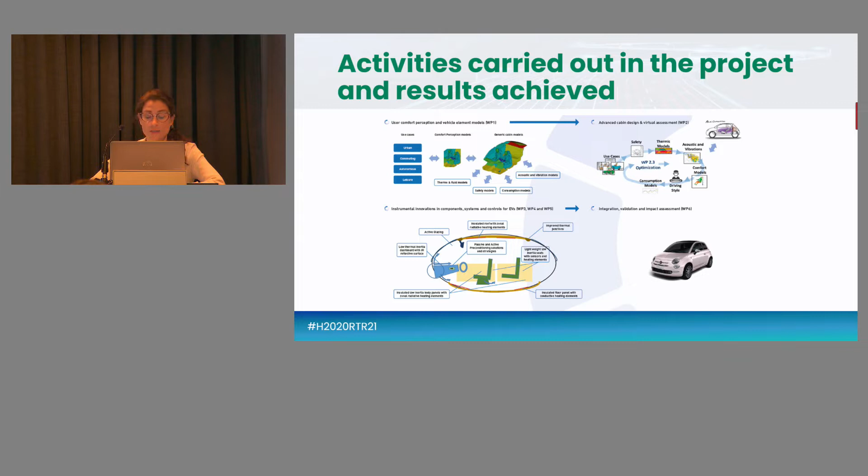So let me show you a video of one of the first tangible results we got for this project, which has to do with a virtual mock-up - a physical virtual mock-up at full scale - that we did during the project. So let's play it.

Current electric vehicle cabin designs are usually derived from conventional combustion engine vehicles that, having the engine as an abundant source of heat, have not been optimized in a way which enables electric vehicle efficiency demands to be met. DOMUS aims to generate designs of radically innovative, user-centric electric vehicle cabins that could help achieve such sustainability goals while achieving effective, safe, and comfortable experiences by vehicle occupants.

As a result, 3 different cabin designs were conceptualized where DOMUS's innovative elements were combined with key innovation design modifications.

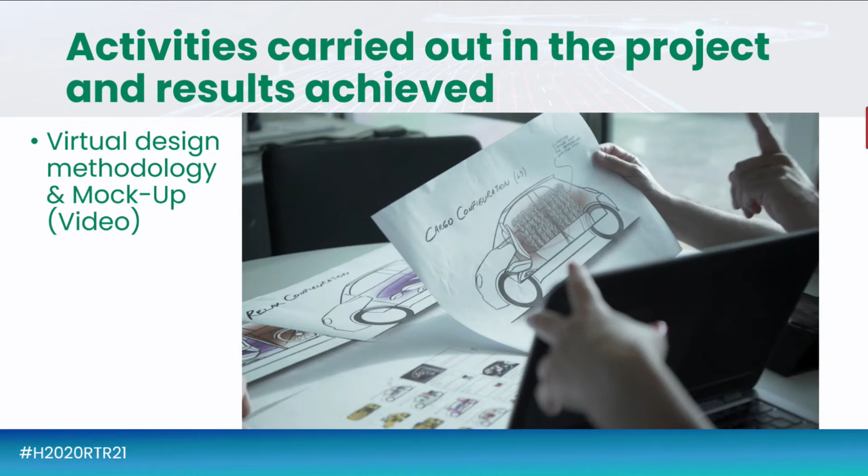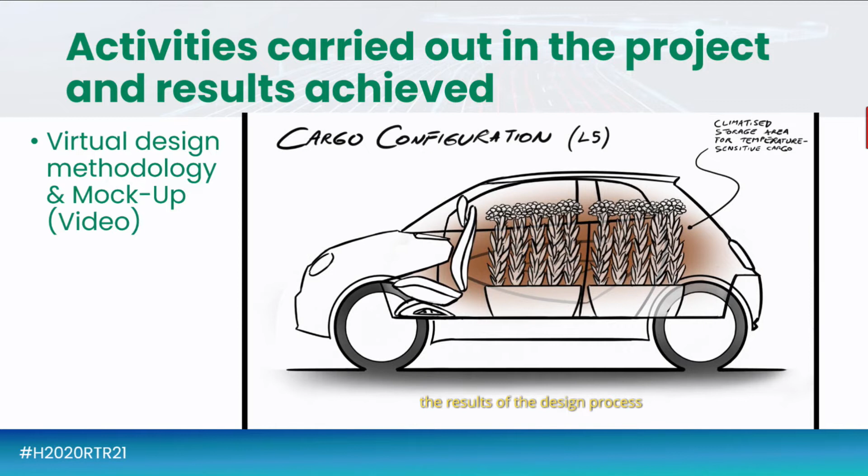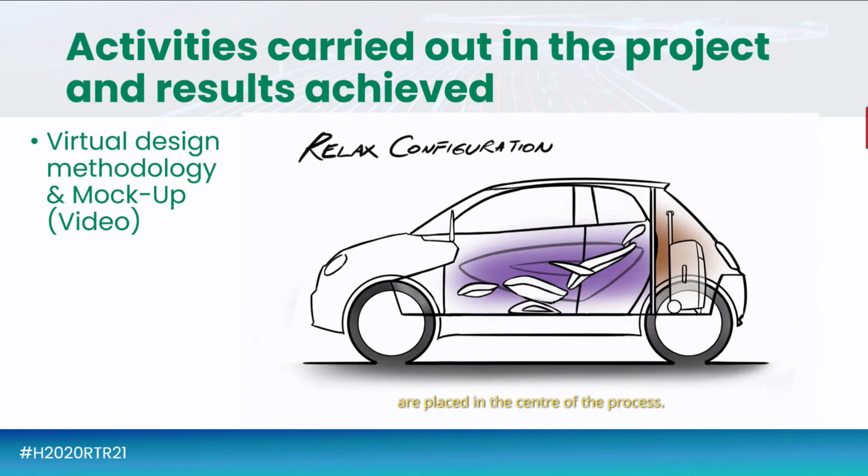The DOMUS consortium decided to make a mock-up of one of these cabin designs in order to show, at full scale, the results of the design process, and to demonstrate the impact that the DOMUS approach has on electric vehicle cabin shapes and layouts, when the criteria of energy efficiency and user needs are placed at the center of the process. To this purpose, the vehicle is conceived as being equipped with autonomous driving features, which allow the passenger to either work or rest during the trip.

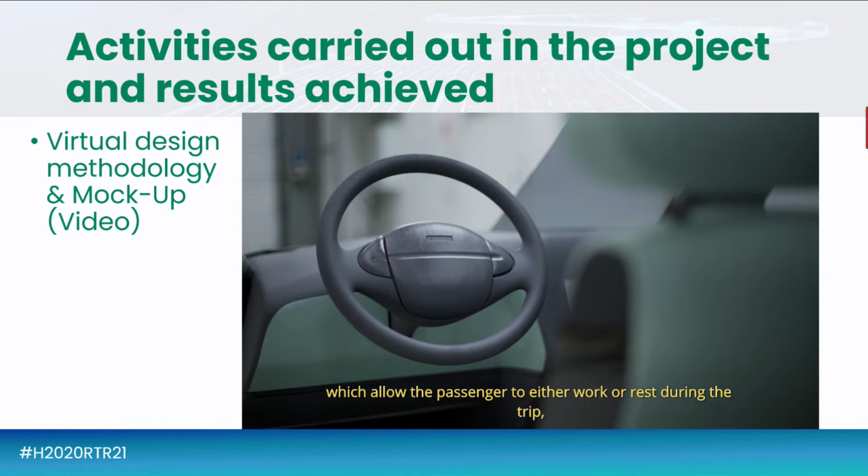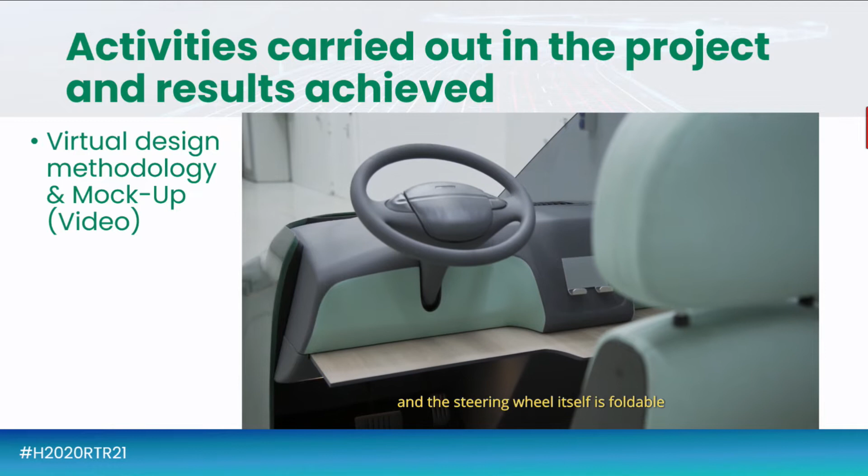To that purpose, the mock-up was equipped with a single reclining seat with a retractable work surface to accommodate a tablet or laptop, and the steering wheel itself is foldable, allowing for interior space modulation. The seat is designed to be lighter than customary, while granting a high passive safety level in the reclined position.

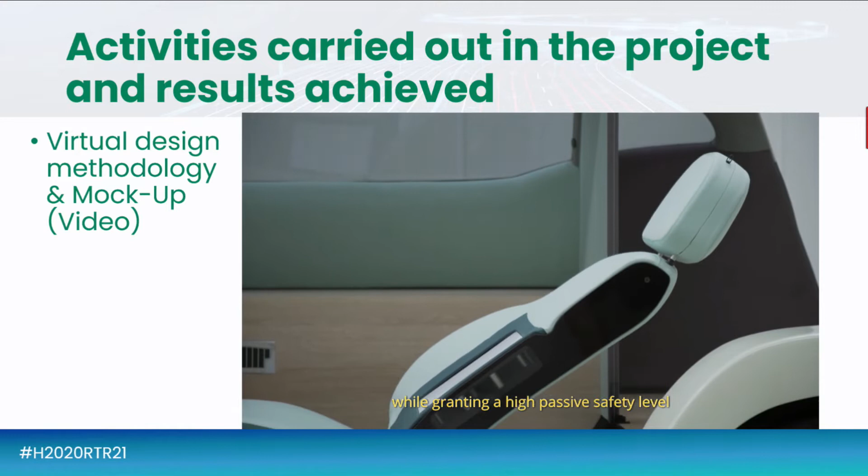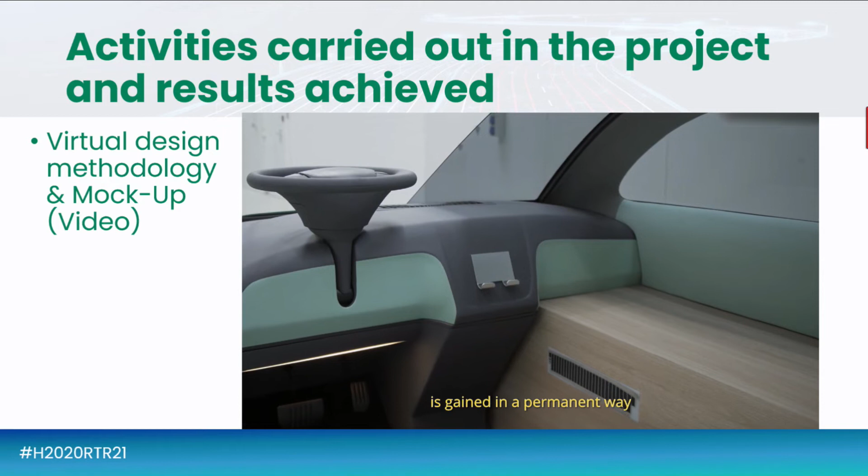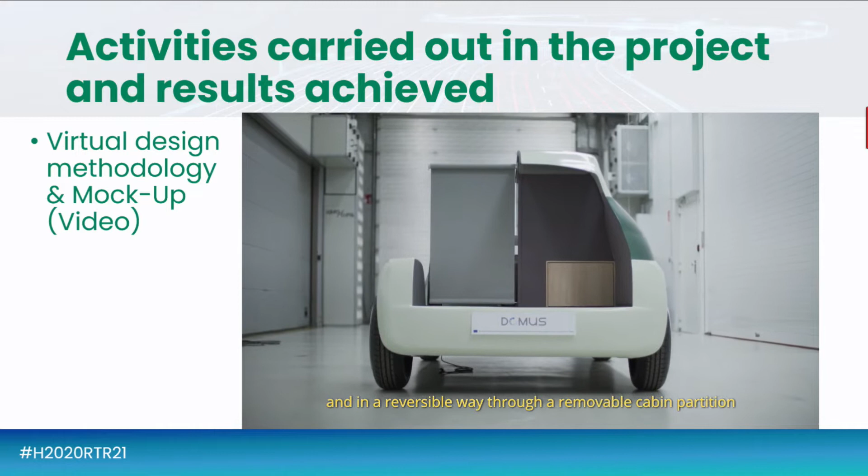A major contribution to the overall passenger compartment volume reduction is gained in a permanent way through the realization of a tunnel-shaped supplementary baggage compartment on the right front side cabin, and in a reversible way through a removable cabin partition comprised of insulating material.

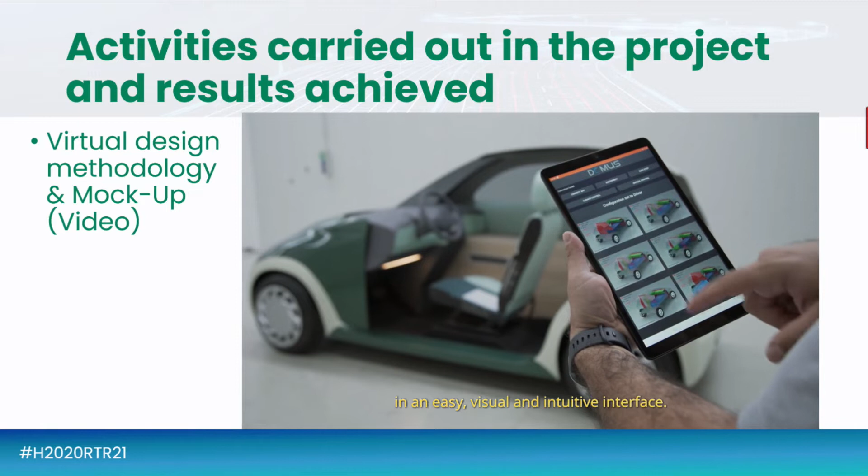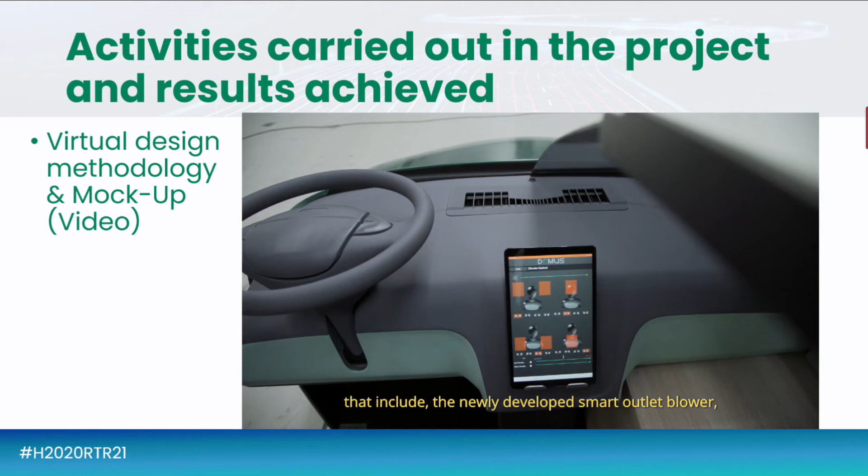Additionally, and to accompany this mock-up, an application was developed in order to control and trigger all the different cabin configurations in an easy, visual and intuitive interface. From this app, not only can the cabin configurations be controlled, but it also enables the user to activate all

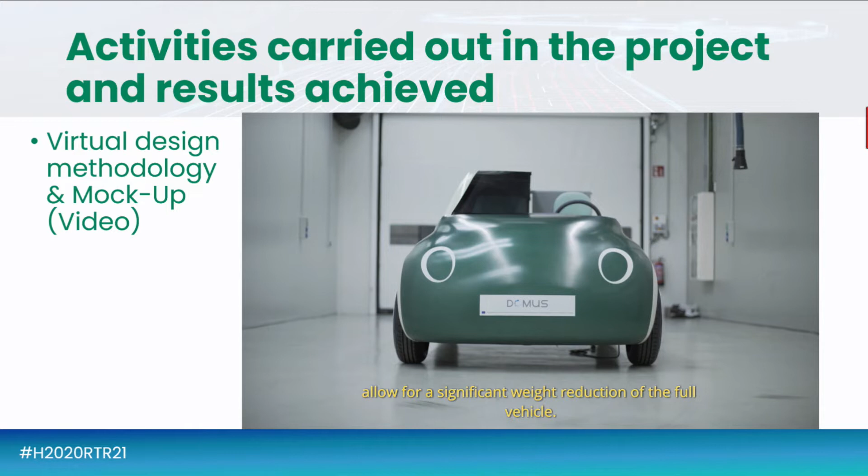the climate control options that include the newly developed smart outlet blower and the radiant panels options inside the cabin. The disruptive design changes of this model allow for a significant weight reduction of the full vehicle, thus contributing to one of the main goals of the DOMUS project.

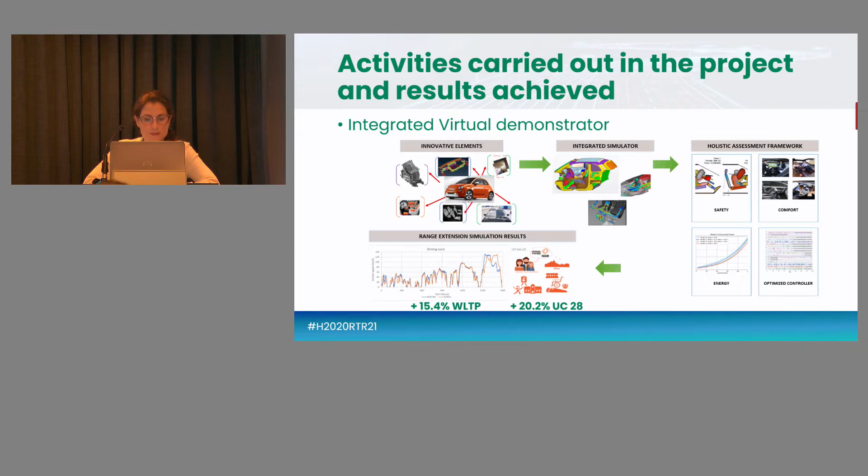As an average, the optimized reinforcement learning controller was able to increase the range of the demo vehicle by more than 20%, compared to the baseline. And when we ran the simulation considering the WLTP conditions, we were able to increase the driving range of the demo vehicle by 15%. It was also demonstrated that the reinforcement learning controller, based on a machine learning approach, performed better than the simple hand-coded controller.

So as I mentioned before, we had physical, tangible results for this project, which is a demo vehicle in which we integrate all the hardware and software innovations. I would like to share with you again the last video in which you can actually see the demonstrator.

Range anxiety is one of the main barriers to electric vehicle adoption by the broader customer pool. DOMUS aims to deliver advanced solutions to significantly lower the energy demand for cabin conditioning by reducing the thermal losses of the cabin, the weight of the car, and finding innovative solutions to warm or cool the cabin.

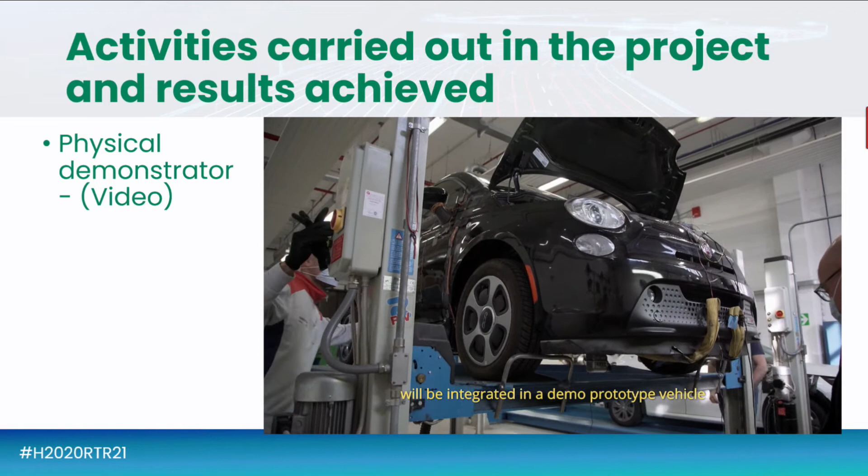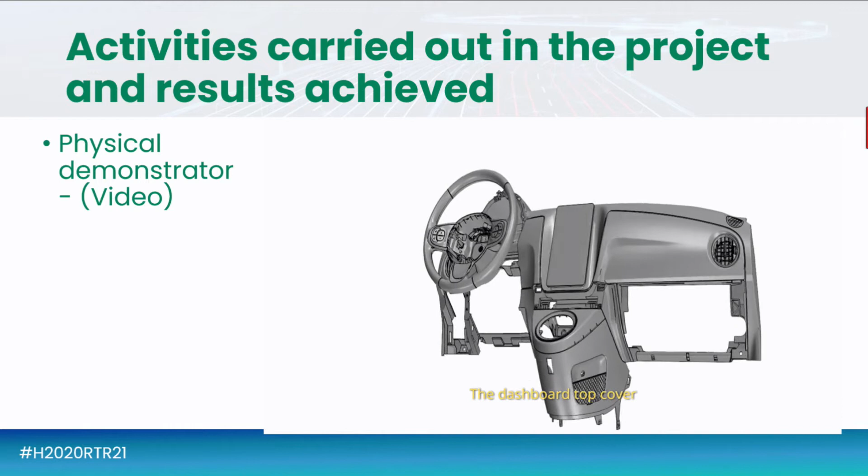All the innovations developed during the DOMUS project will be integrated in a demo prototype vehicle that will allow the validation of the technologies developed. These technologies include the dashboard. The dashboard top cover was modified from the original baseline by changing the materials used in order to reduce the weight.

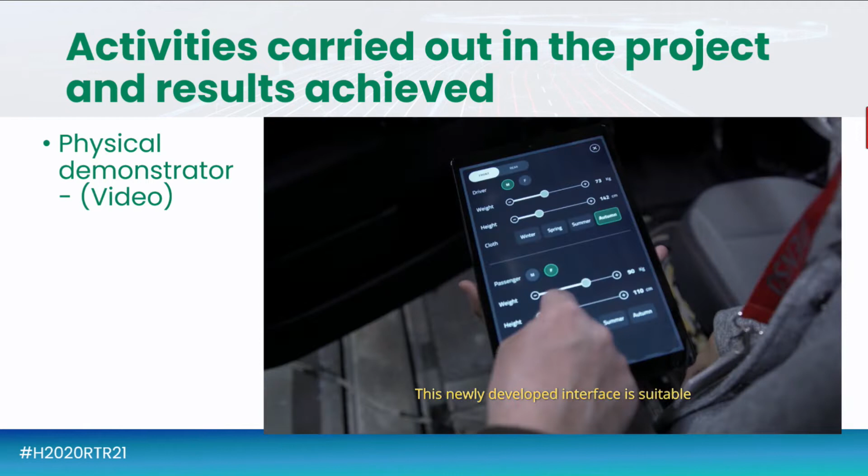The design was also changed in order to accommodate the human-machine interface developed for the DOMUS project. This newly developed interface is suitable for the operation of the systems, and it displays each component, allowing for easy, intuitive, and precise control of all the elements.

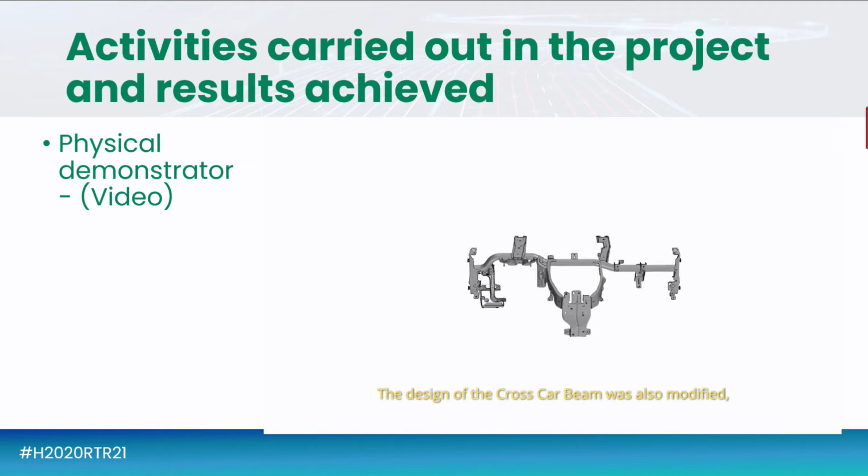The design of the cross-car beam was also modified, as the passenger section usually made of steel was substituted with a lightweight material. Radiant panels: a set of 14 individual radiant panels made of printed foil heater have been integrated in the interior components of

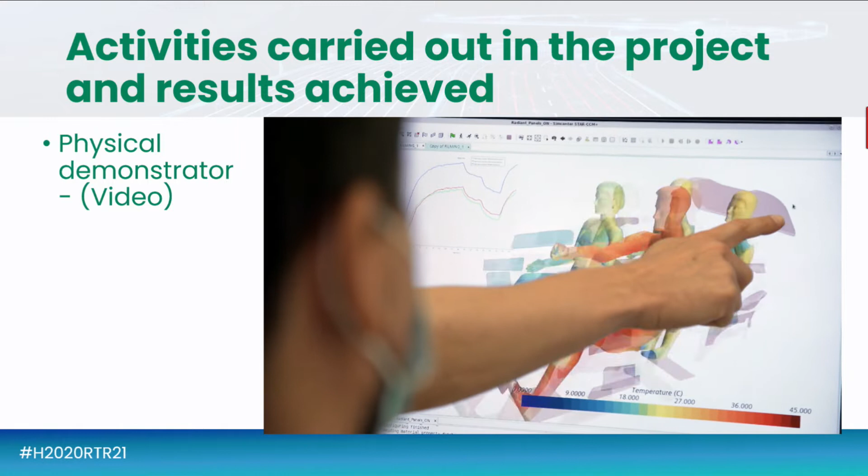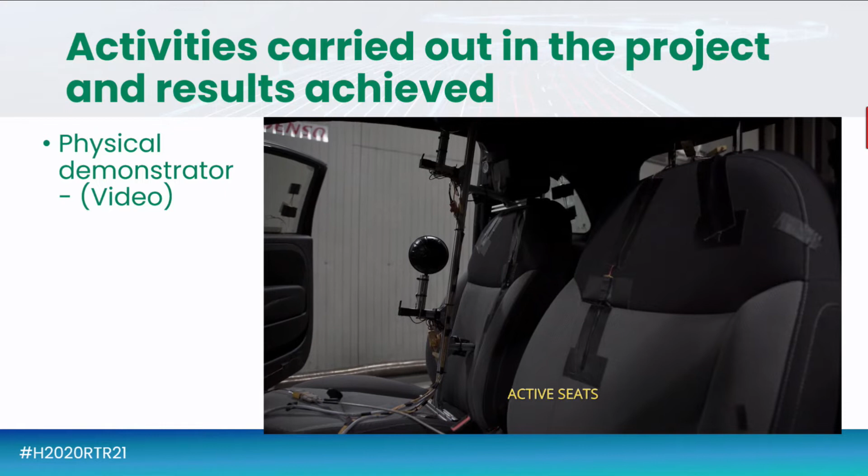the vehicle. Active seats: the entire weight of the seat has been reduced by building a high-strength steel frame, low-density foam, and new trim cover material. There is a heating mat in the cushion and backrest of the front row seats, and a radiant back panel in the passenger and driver seat.

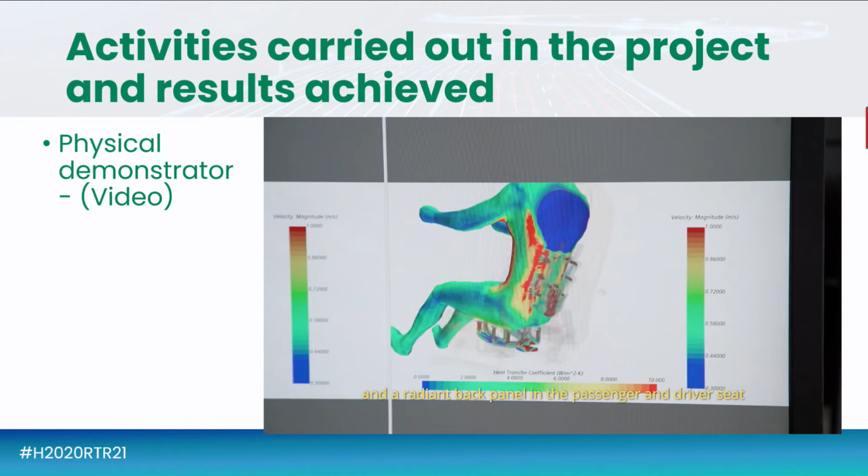Also integrated is a cooling system, consisting of a lightweight fan and thermal fit air ventilation. HVAC unit: the HVAC has been completely redesigned in order to decrease its size and weight, and also to reduce its energy consumption.

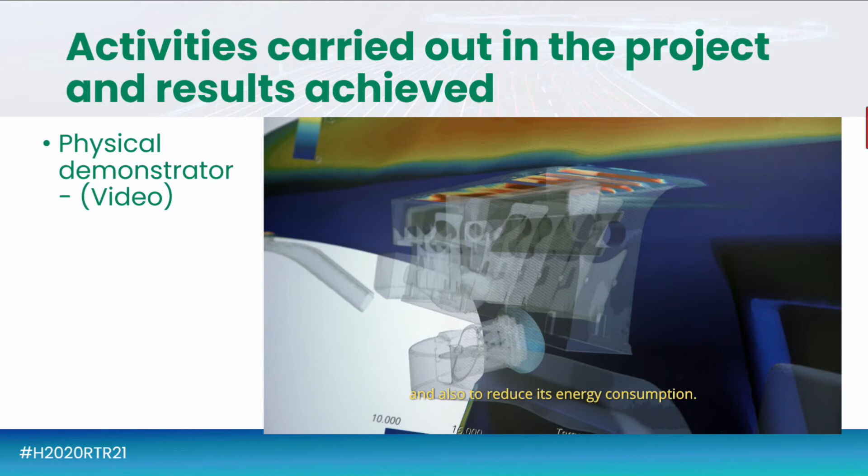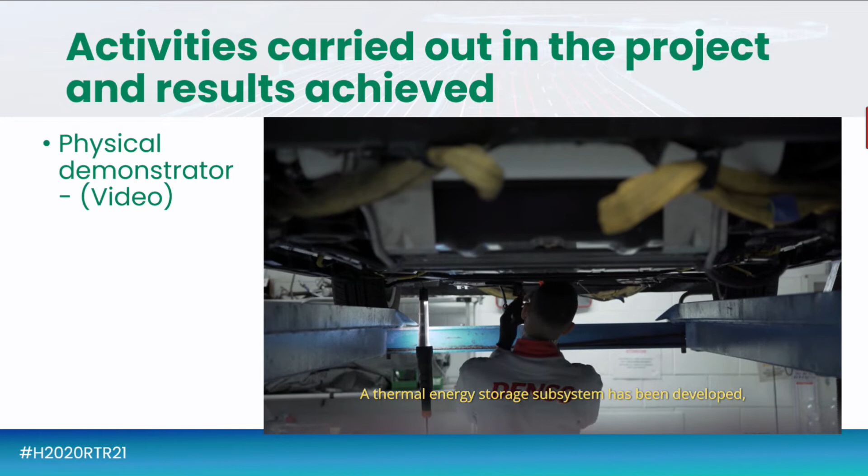TES, Thermal Energy Storage. A thermal energy storage subsystem has been developed. With it, otherwise wasted thermal energy can be captured and stored. This energy can then be used to heat up the cabin.

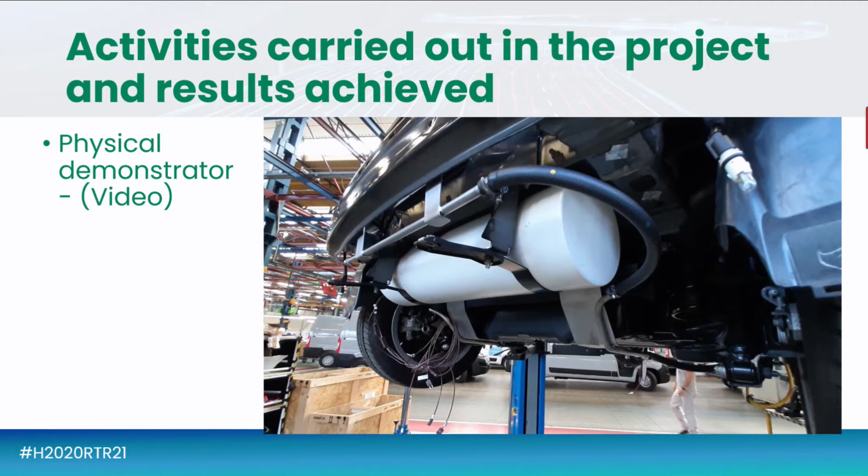Insulation panels. The insulating panels were made with phase-changing materials and super insulation materials based on vacuum technology that exhibit very low thermal conductivity and a low density.

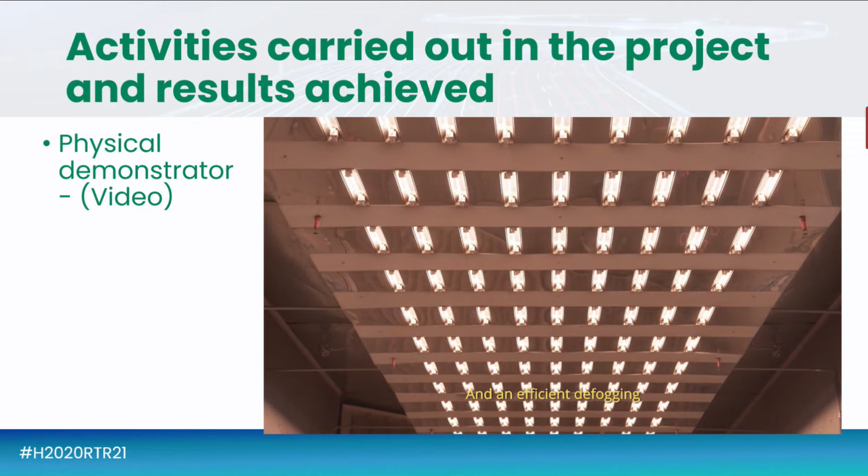Glazing. All glazed surfaces, windshield, rear window and door windows are fitted with electrical heaters and coated with a sun-reflective layer. An efficient defogging and defrosting system of the glass has been integrated.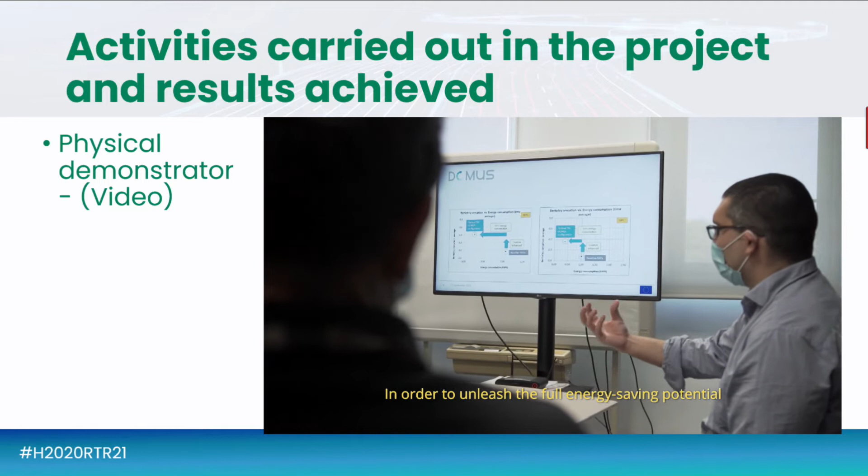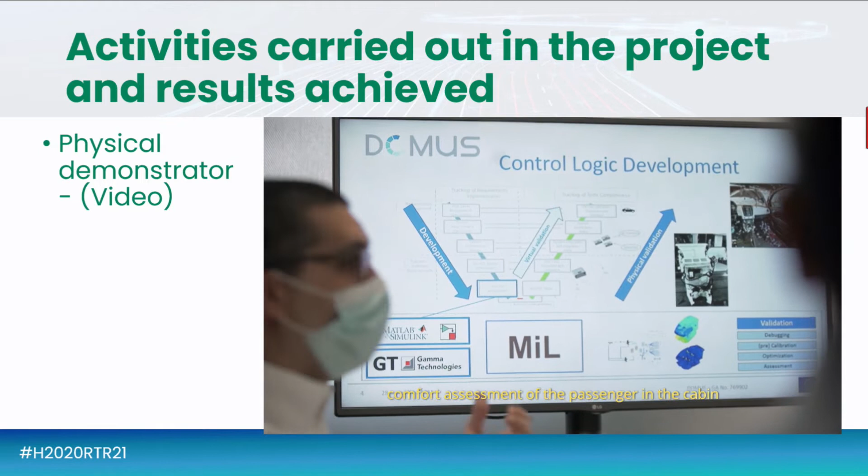Automatic control logic. In order to unleash the full energy-saving potential of these new active components implemented in DOMUS, the project introduces an automatic control logic capable of performing a real-time perceived comfort assessment of the passenger in the cabin and responding by determining the most energy-efficient combination of actuation parameters to all active components in the cabin.

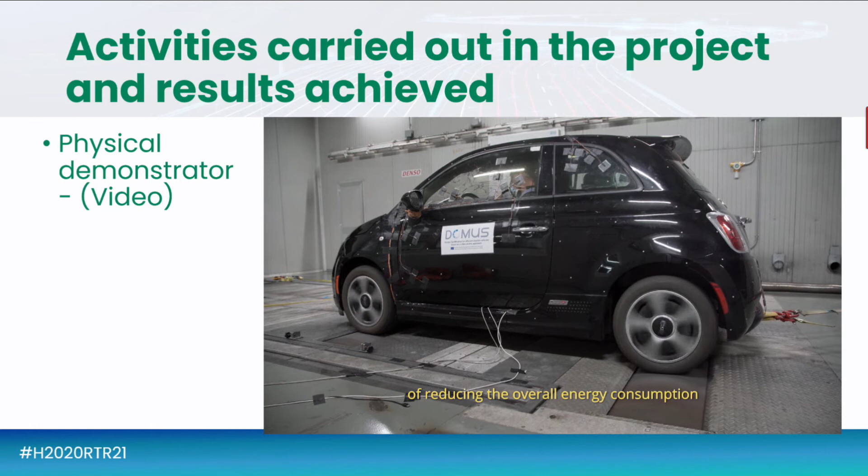All this research and innovation will help DOMUS achieve its main objective of reducing the overall energy consumption of future electric vehicles, thus increasing the electric range in different climatic conditions, while maintaining comfort and ensuring safety.

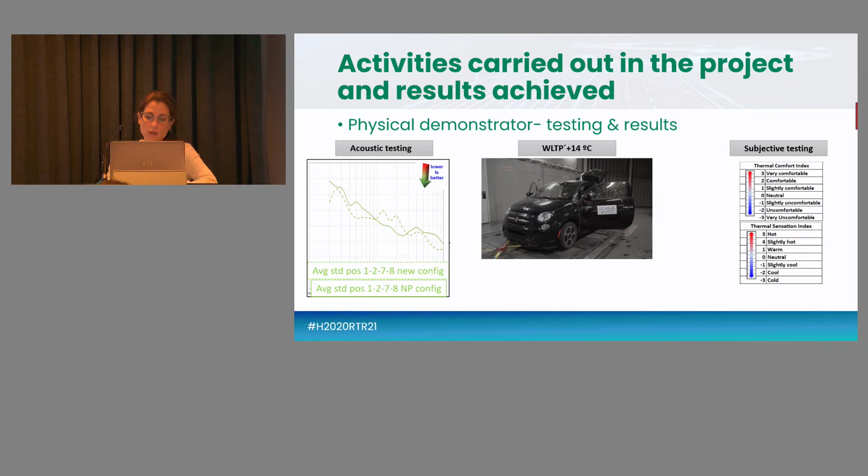For the results of the acoustic testing, we placed a noise source on the side panel of the car and on the roof, and we also placed microphones inside the cabin in order to measure the acoustic intrusion. The discontinuous line shown represents the new configuration of the Fiat 500, the DOMUS demo car vehicle. In general, the performance was better in the demo car, mainly thanks to the insulation panels created and integrated by Hutchinson.

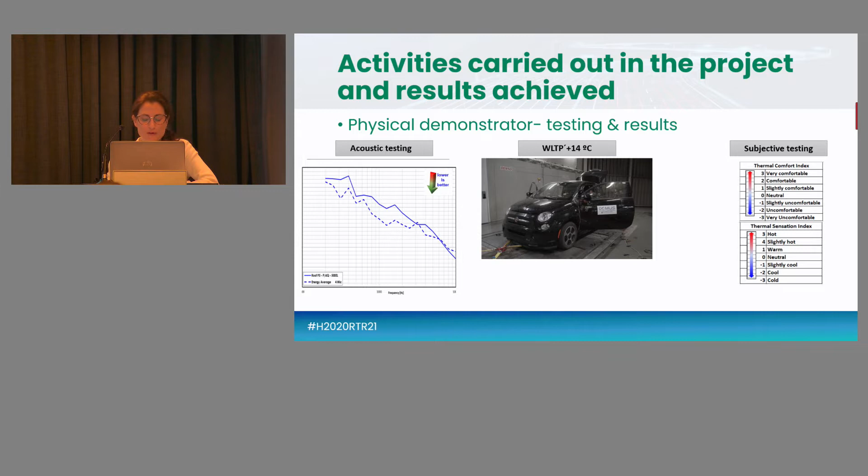That is another result for another acoustic testing. These are the best results that we got regarding driving range, which again was the main objective of the project, to reduce the energy consumption of the cabin in order to increase the duration of the battery and the driving range. The best result we got was at WLTP at 14 degrees, where we increased almost 10% of the driving range compared to the baseline.

We achieved this with similar thermal comfort. Thermal comfort here means we measured the air temperature on the passenger side in both the baseline and the demo, and they were the same. Regarding acoustic comfort, we consider it higher comfort because apart from the better insulation mentioned previously, the blower and compressor also work at a lower speed, so we can imagine the noise comfort was better.

Safety and visibility: there was no windshield fogging in the demo car during testing, and we also had a CO2 sensor implemented in the demo car in order to activate the recirculation mode as much as possible, which of course saves a lot of energy. The limit we put in terms of safety was 2,500 ppm, and it never reached that limit.

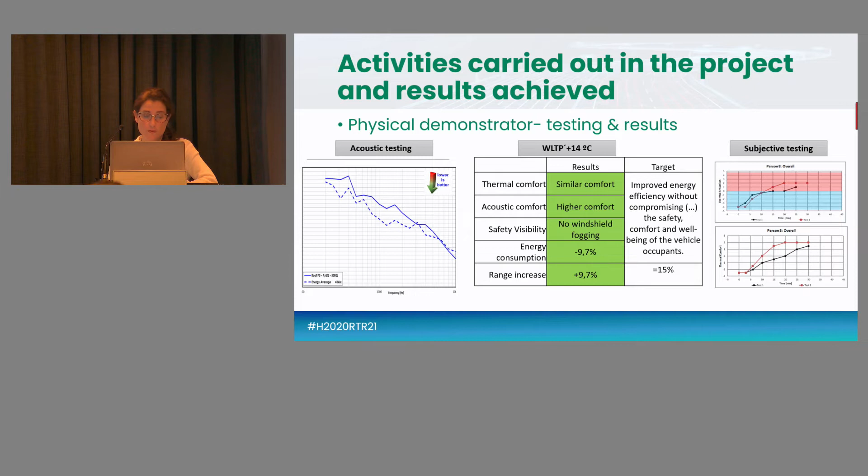We also performed subjective testing, measuring the thermal comfort and thermal sensation of the demo car in the street with a warm-up test. We performed two tests, one with the radiant panels activated and one without. We had 8 different participants, and the results showed that the thermal comfort and sensation was reached faster and lasted longer when the radiant panels were activated during warm-up.

I would also like to mention that during the 4 years of implementation time for the project, we had the chance to participate with other projects. For instance, we had a clustering workshop with the Quiet project, another H2020 project within the same call as DOMUS, which had the same objective and finished 6 months before we did.

We made parallel sessions per topic because we had 3 main lines of action: thermal management, modification of the cabin, and virtual approach. We also had the chance to have a stakeholder meeting with Biomotive, another European project researching replacing the materials of the cabin interiors with more eco-friendly alternatives.

In terms of mid to long-term expected impact of the project, we believe we have contributed to the 3 main impacts we aimed at during the proposal, which include increasing the electric driving range. We didn't reach our objective, but we made progress in terms of simulation, with 2 different assessments of driving range: virtual assessment and real testing. We don't have the same results, but in all of them we have positive outcomes.

Regarding the impact for improved energy efficiency without compromising performance, safety, and comfort, we have developed 2 different controls with that criteria in mind, and they have all been completed successfully. We have also designed and prototyped hardware components that reflect this criteria.

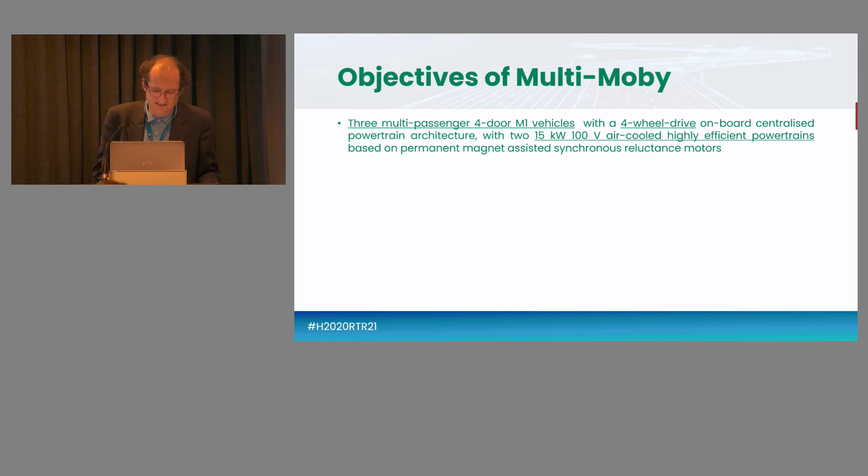If we look at the objectives, the target of Multi-Moby is to develop a small fleet of electric vehicles. In particular, we are talking about 3 multi-passenger 4-door M1 vehicles with a 4-wheel drive on-board centralized powertrain architecture. The motors are part of the so-called sprung mass of the vehicle, with 2 15 kilowatt, 100 volt, air-cooled, highly efficient powertrains based on permanent magnet-assisted synchronous reluctance motors, with low content of rare earth materials.

Then, to complete the fleet, we have 3 multipurpose vans: an L7CU prototype, which is also 4-wheel drive, with 2 7.5 kilowatt 48 volt air-cooled powertrains and a low-cost belt-based transmission system; and 2 M1 versions, again 4-wheel drive, one with 2 15 kilowatt 100 volt air-cooled powertrains, and the second with 2 15 kilowatt 48 volt liquid-cooled powertrains.

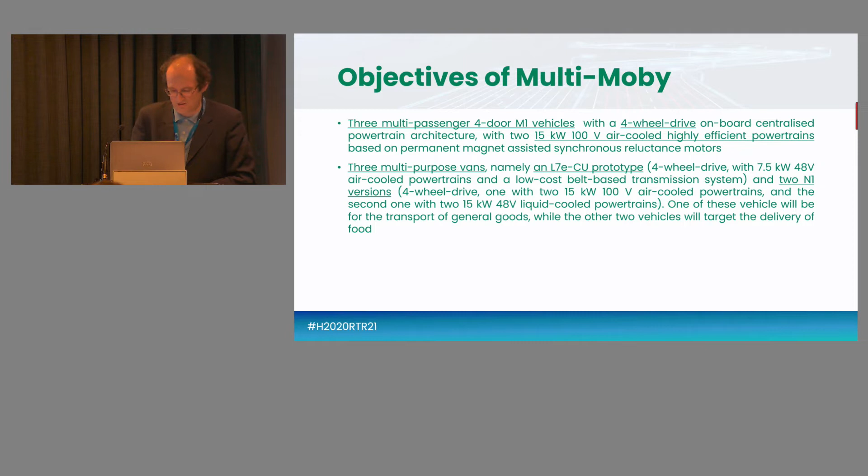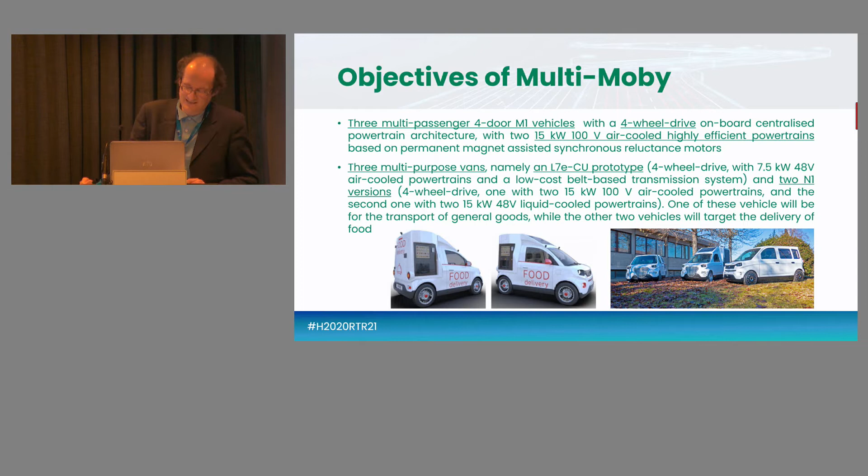One of these multipurpose vans targets the transportation of general goods, while the other 2 vehicles will target food delivery. Here we can see 2 rendering pictures that were included at the submission time of the project proposal, but we can also see a photograph of the current generation of the electric vehicle prototypes of Multi-Moby.

Multi-Moby covers a lot of areas that are required for systems integration at the vehicle level. In particular, Multi-Moby includes electric powertrain optimization.

In this area, we have a continuation of the activities that started in the previous European project TELL. As I said, there is the development of a 100-volt powertrain by Dana TM4 and two 48-volt powertrains by Valeo Powertrain Systems. The development process of the electric powertrains is based on simulations, digital twinning, and optimization.

For example, in this picture we can see a motor, rotor, and stator topology sensitivity analysis that was carried out in order to understand the sensitivity of the geometry of the rotor and the stator of the motor with respect to the energy loss during a driving cycle, as well as with respect to the variation of the peak torque and the torque ripple of the machine.

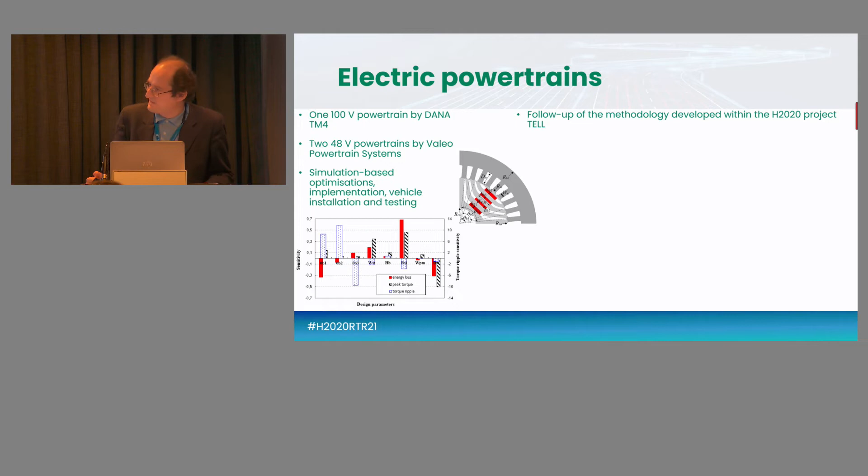So this virtual process of optimization of the components is followed by implementation of the hardware, installation on the vehicle demonstrators, and finally testing. Here we can see some of the pictures of the prototype components that have been provided by the relevant participants.

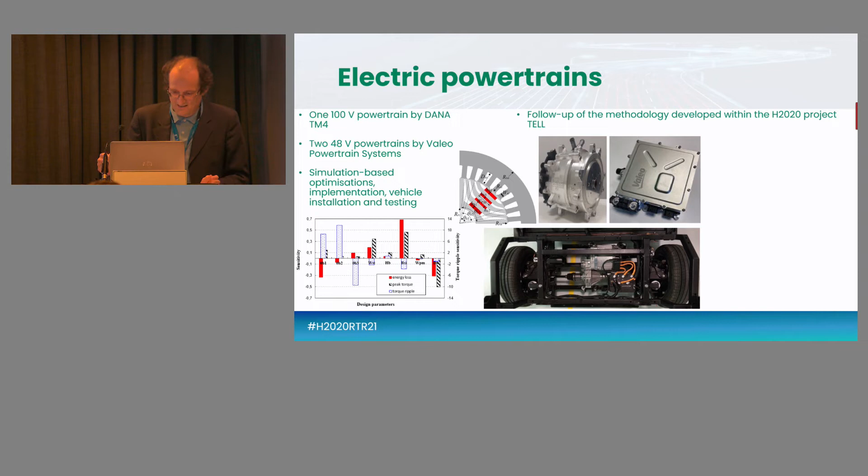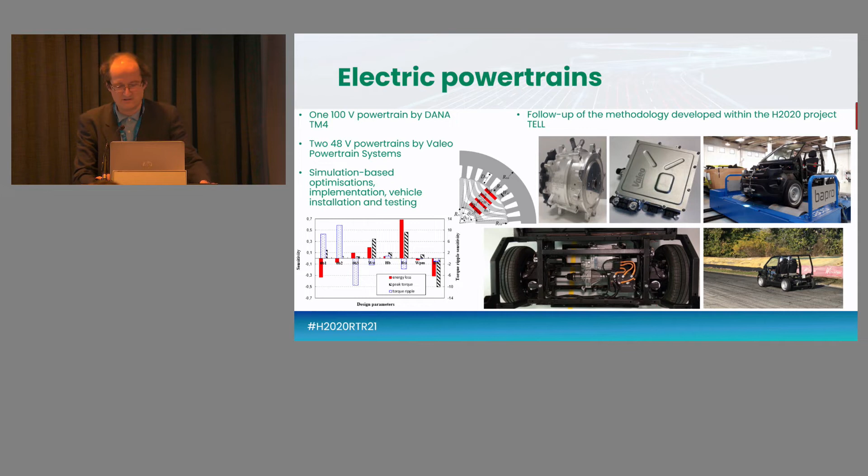We can also observe a preliminary installation of one of the electric powertrains on an initial prototype of the electric vehicles by IFEVs. And then we can see, for example, a picture of a preliminary testing session on the rolling road facility at IFEVs of the so-called mule vehicle, that is a preliminary version of the demonstrator vehicle, and this activity also involves some form of testing on tracks or proving grounds.

Another very important aspect of Multi-Moby is the enhancement of safety. Safety, first of all, in terms of passive safety. This aspect has been dealt with, in particular, by the participant CIDAUT. CIDAUT have designed, together with IFEVS, a high-strength steel structure combining low cost with high energy absorption capability and stiffness. This is a follow-up of a previous FP7 project called PLUS-MOBY.

In this steel structure of the chassis, different products of the dual-phase steel family are combined. The activity consists of finite element analysis, followed by physical crash tests at the CIDAUT facility.

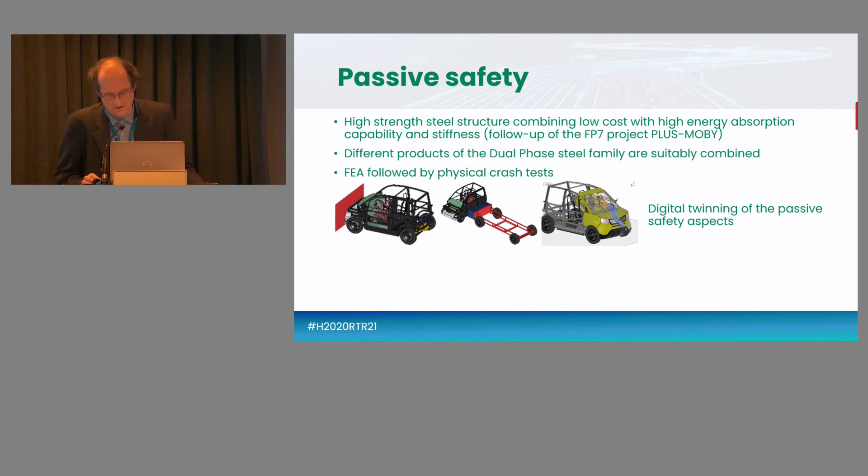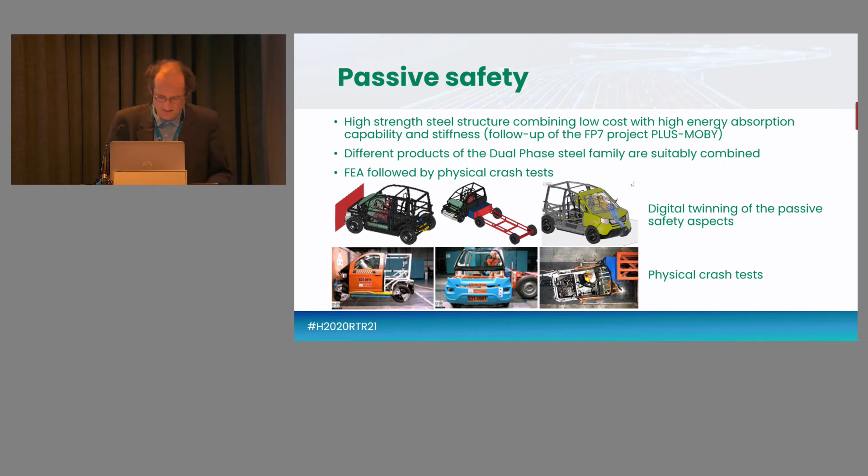So here I have included some of the pictures of the models that have been used within the structural optimization of the chassis. And then at the end of 2021, also some pictures of the physical crash tests that were carried out at the CIDAUT facilities in Spain.

I have discussed passive safety. Another essential aspect in light electric vehicles is active safety. Differently from other projects where the approach is to target high segment vehicles characterized by very complex as well as expensive chassis actuation systems, in this specific project, as low cost is an essential point, we are trying to implement smart solutions that do not imply significant additional hardware cost for enhancing active safety.

One example, among various others, is the preemptive trail braking control function. The basic fact is that nowadays, if we have a car with a conventional stability control system, the control system is a reactive system. So if a driver approaches a corner at excessively high speed, the stability control system, once the vehicle tends to become unstable within the corner, tries to actuate the friction brakes individually in order to keep the so-called side slip angle and the yaw rate of the vehicle under control.

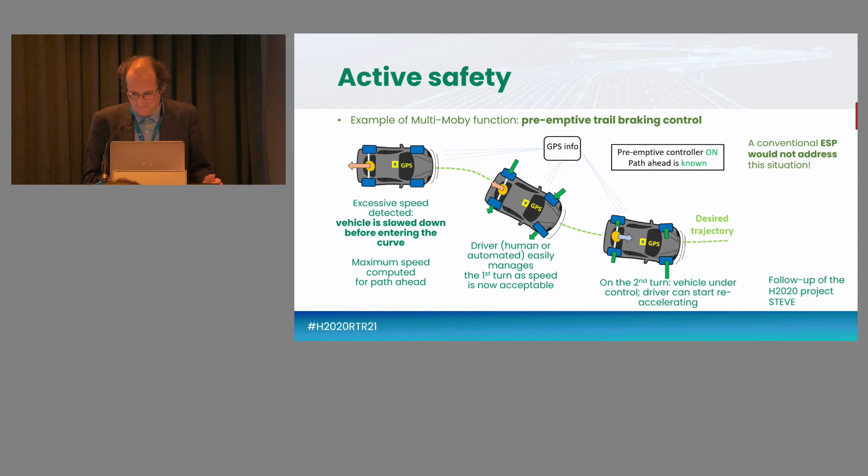So this is a rather simple functionality that, of course, implies some form of vehicle connectivity and predictive preemptive control, but this gives a functionality without additional hardware cost, a functionality that goes beyond the typical functionality of a conventional stability controller.

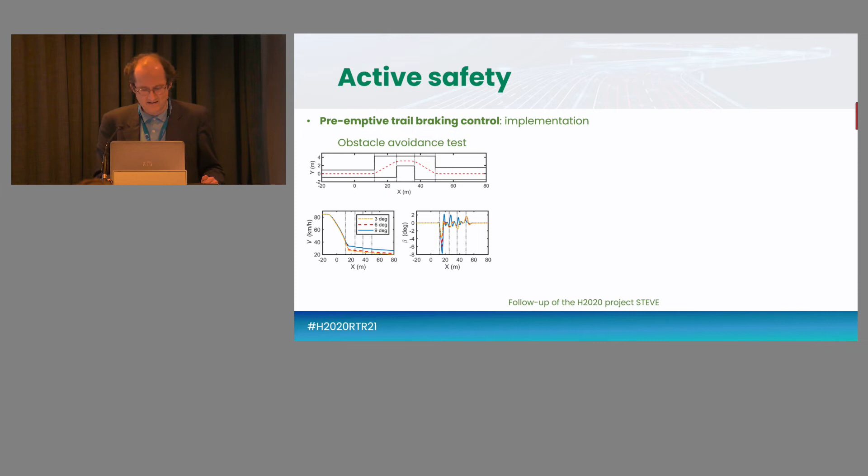So essentially, we can achieve the same functionality as much more complex systems without having significantly complex actuation hardware. In the first part of the project, after running some simulations, we have also preliminarily implemented this function on a light electric vehicle demonstrator.

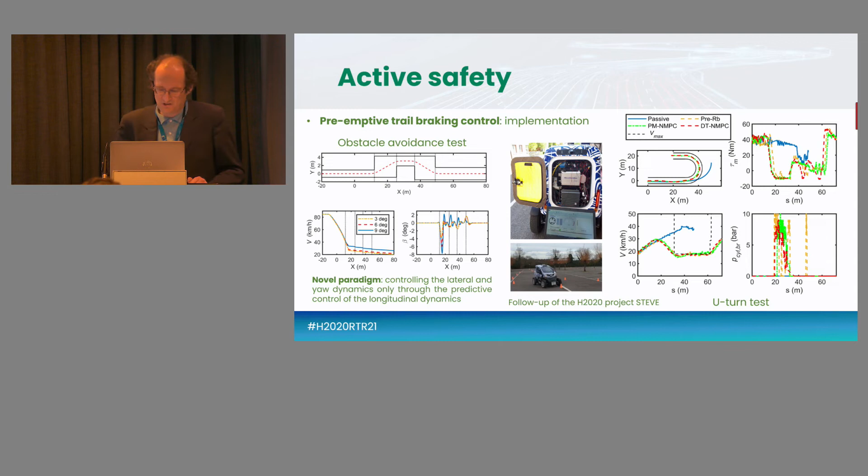For example, these are experimental plots obtained in the car park of our university of a U-turn test, so X and Y indicates the trajectory of the vehicle, in which the driver tries to accelerate the vehicle during a U-turn test.

So we can see that the passive version of the vehicle is characterized by a progressive acceleration, but the vehicle speed is excessively high with respect to the turning radius. As a consequence, the vehicle without the controller cannot stay within the lane.

Whilst with the different versions - pre-RB, that is a rule-based version of this preemptive braking controller, with PM-NMPC, a simplified version based on nonlinear model predictive control, and with DT-NMPC, a double-track model-based nonlinear model predictive controller version - we can see that the vehicle can follow the reference trajectory. The vehicle is slowed down when necessary, but then at the exit of the corner, the vehicle is reaccelerated because the controller deactivates.

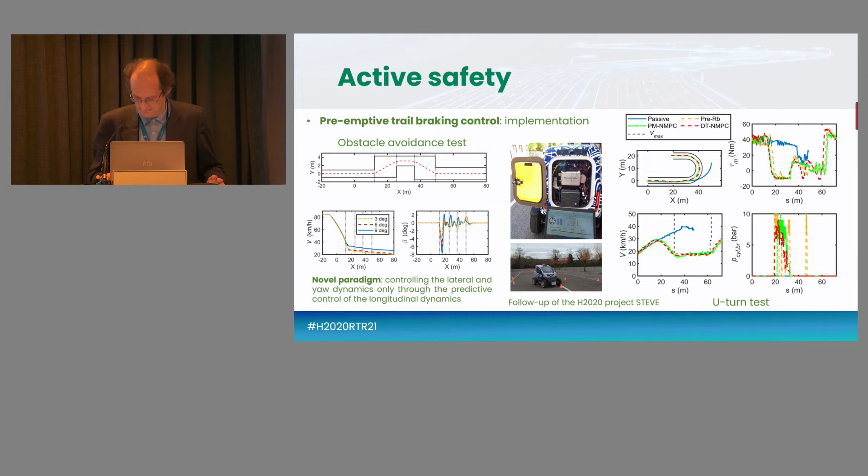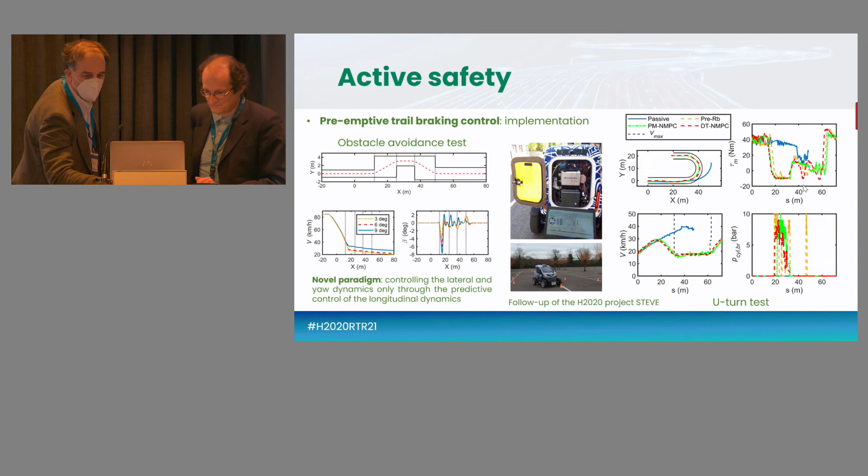Another example of the... the presentation seems to be stuck. No, I don't have any video in this presentation. I don't know why. Hopefully.

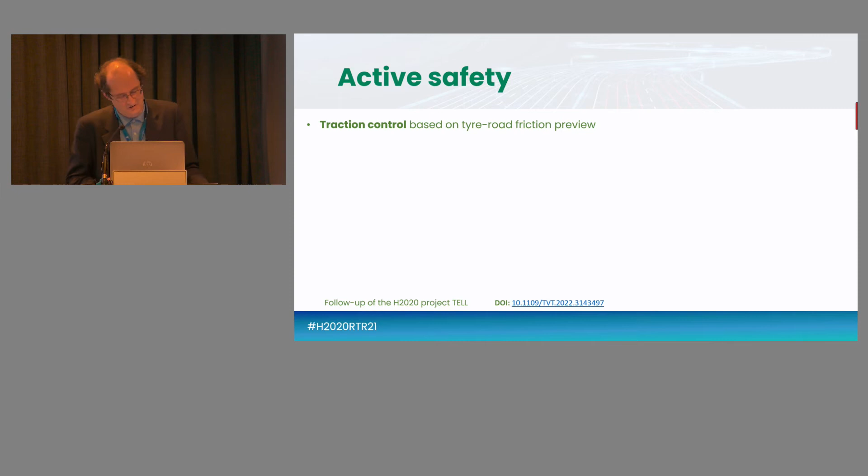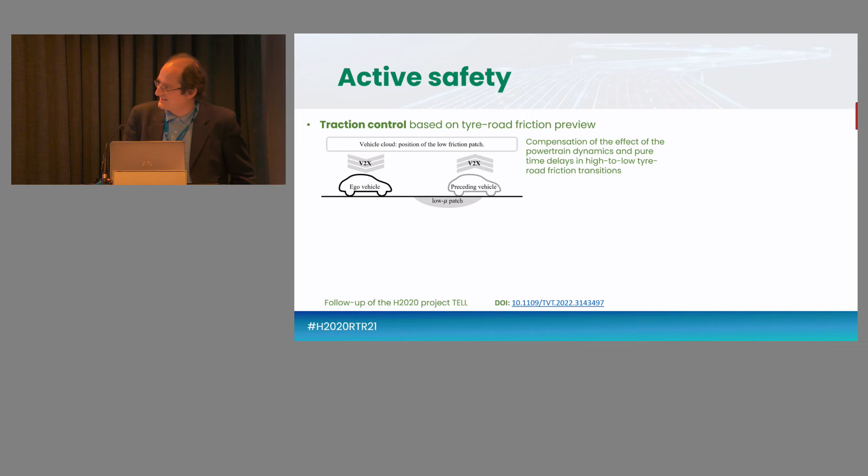Another example of a smart control function that has been developed within the project TELL, but now it is transferred to Multi-Moby, is the preemptive traction control function. So essentially the idea is that in future, thanks to vehicle connectivity, it will be possible to know in advance the presence of low friction patches on a road. So it is possible, for example, to pre-alert the traction control system regarding potential hazardous situations in terms of tire-road friction conditions.

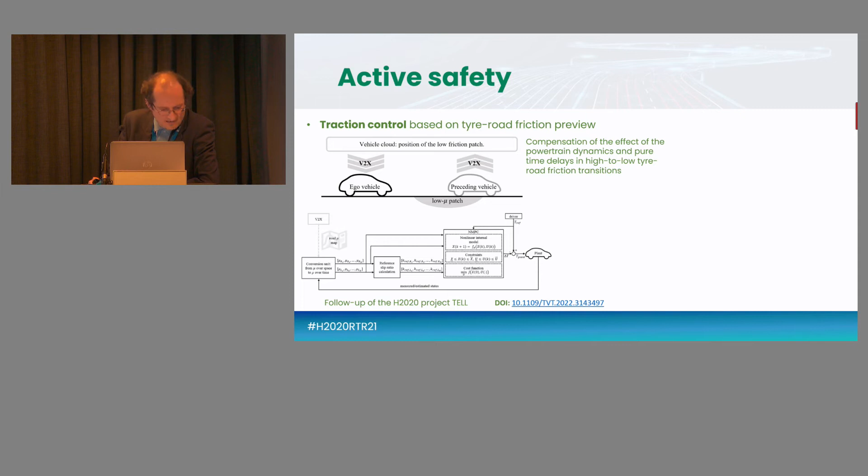So in TELL and then in Multi-Moby, we have implemented, first in simulation and then also tested experimentally, a nonlinear model predictive controller that works under the assumption that we already know in advance the friction coefficient profile of the road in front of the vehicle. As a consequence, we can change the reference slip ratio as well as the prediction model of the model predictive controller that runs in real time on the vehicle in order to preempt these friction transition events.

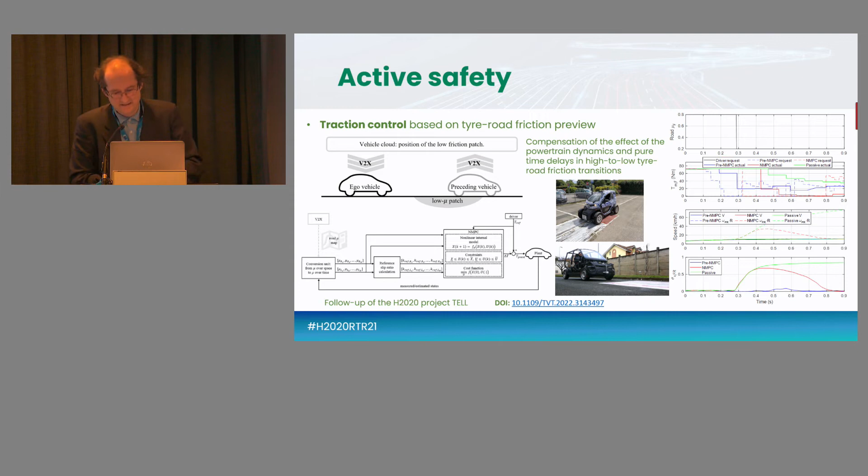And we have tested this functionality again, first on a light electric vehicle in our car park. Then once the functionality was calibrated, we also transferred it to the Multi-Moby vehicle in IFEVS. And here we can see some plots of the experimental results where we have a comparison between the passive version of the vehicle, so without any traction controller.

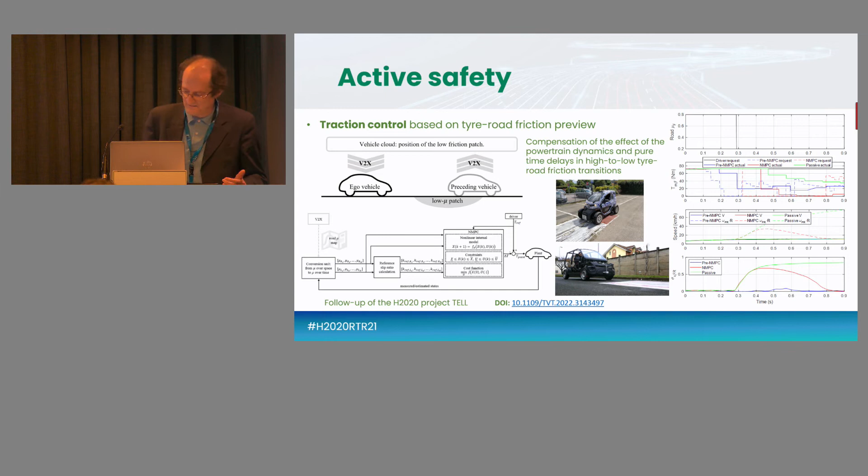In particular, I would suggest to have a look at the last plot that plots the so-called sigma x front right variable - this is the slip ratio of the front right tire. We can see that the passive vehicle has significant slip when we have the transition of road mu from high to low, whilst the vehicle with the so-called NMPC, a sort of conventional benchmarking traction controller, can manage to control the slip, but there is more or less half a second of time in which the controller cannot deal with it because of the delays of the electric powertrain. Whilst with a preemptive controller, corresponding to the blue line called pre-NMPC, we have a preemptive compensation of the tire slip event with consequential benefits in terms of longitudinal and especially lateral vehicle dynamics.

So these are only examples of the many functionalities and items that are being tested and developed within Multi-Moby, because there is also a lot of work, for example, in the area of charging, of battery charging, in the area of hybrid energy storage that I haven't even mentioned.

In terms of impact, well, for sure there is a significant industrial impact in terms of vehicle safety, both in terms of passive and active safety. Multi-Moby will also implement in the second half of the project some form of driving automation function, but we are still in the process now working on those. Then we have impact in terms of energy efficient electric powertrains for 100 volt and 48 volt applications with limited content of rare earth materials, hybrid energy storage systems, and of course the vehicle level, simple but smart vehicles with best-in-class energy consumption characteristics.

And last but not least, IFEVS, thanks to the background of previous European projects, is experimenting a microfactory concept for low investment localized production.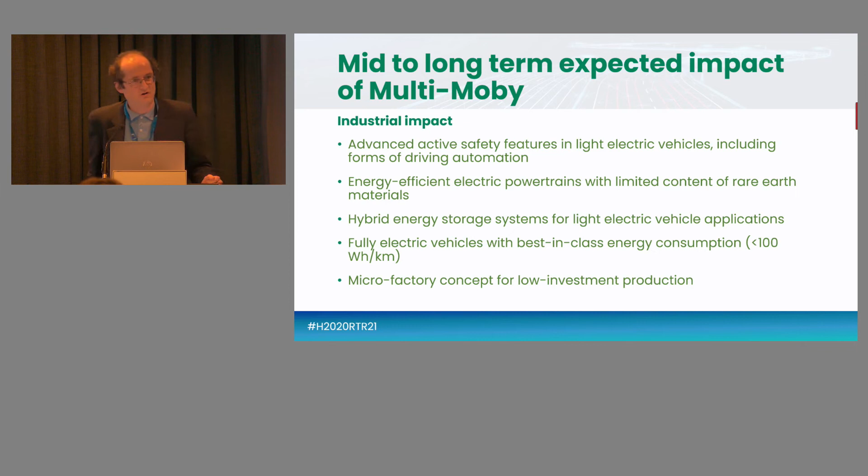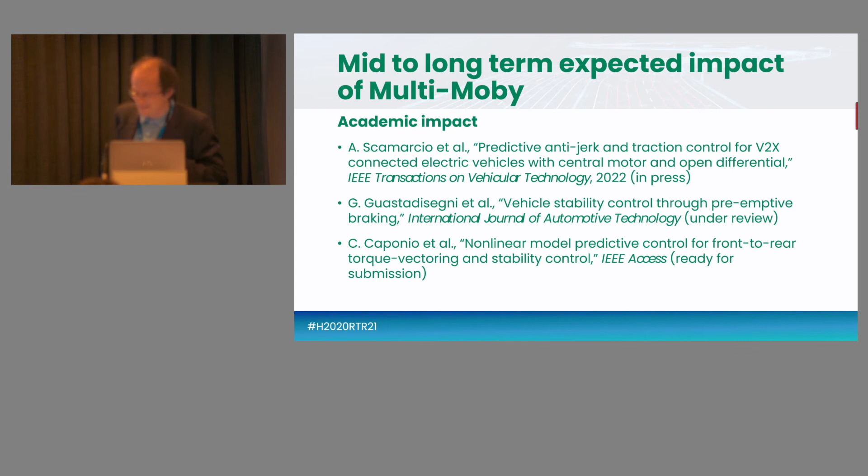Finally, I would like to mention the fact that we try to generate also some academic impact to have a long-term spread of our research in the community, in the academic community. For example, in the first project year, we have produced 3 journal papers. Thank you very much for your attention.

As a last point, I would like to mention that we are part of the so-called Evolve cluster that includes 8 European projects on the topic of vehicle electrification. So we have already implemented some joint workshops to disseminate our results.